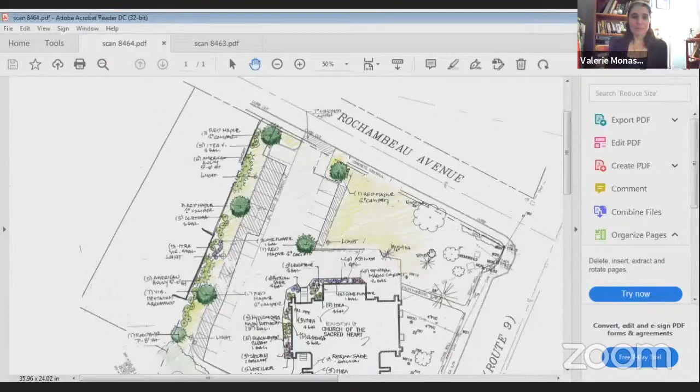Okay, so let's take action on it now. I know we have a resolution for it. So let's move to...

Is there a motion to resolve that, as an essential precondition to further review of the proposed project, the Board of Trustees of the Village of Dobbs Ferry hereby directs that the project be referred for comment and recommendation to the Dobbs Ferry Planning Board as required by the zoning code, and referred to the Westchester County Planning Board in accordance with the general municipal law based on the proximity of the subject property to Broadway Route 9.

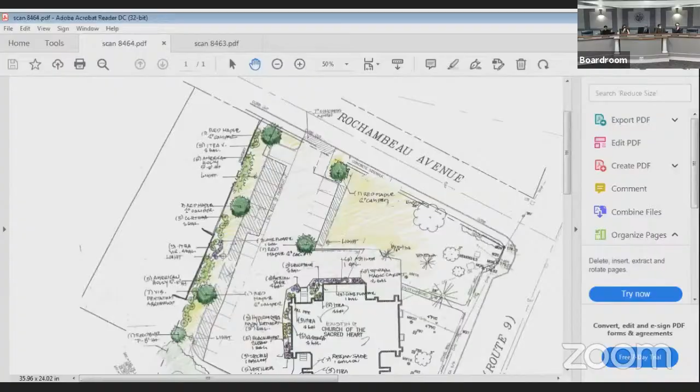Is there a motion? Trustee Patino, second. Trustee Nell, all in favor? We can't see, could you take that down off the screen? Sorry, okay, all in favor? Okay, that passes unanimously, so it's done.

We have to come back anyway. Yes, we'll see you in about... well, I'm not going to say. Thank you, hopefully we'll take care of it with the snow.

The next item is a presentation on the Main Street sidewalk improvements by George Palmer. I'm assuming he's joining virtually. I'm here.

So if I can just comment for the board and for the public before George begins: the village went out for bid once before on Main Street improvements, and at that time did not go forward with the project, I think due to COVID-related issues. In the meanwhile, some additional funds were identified and were able to be transferred over to the project, so you have a more significant amount of money to deal with, which should cover most of the costs. At this point, because of the length of the grants assigned to this project, we're told it must be completed by the end of 2022, or you're going to lose the grant funding.

So it's quite important that this process move along. George is here, we've had a number of meetings about this, with the tree committee and internally as well, to discuss the different options before you. I know we've discussed this before, but this is in greater depth. The time really now, in the best of all possible worlds, if you were going to try to accommodate the grant, is to try to settle on a plan, and if you're ready to move forward, to then authorize the preparation of the bids and get everything nailed down so you can start this project in early 2022 and get it done by the end of the year. So with that, I'll turn it over to George. George, thank you for joining us.

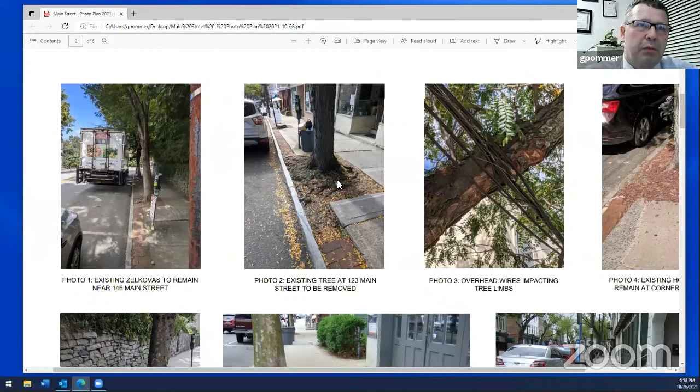Photo 3 shows the issues we're having with the low wires from Altice, the cable provider in the area. You can see that they're damaging the trees.

Photo 4 is out in front of Sam's Restaurant, showing one of the treatments that has evolved over the years, where someone put wood chips in that area to soften the jaggedness when the mulch or whatever treatment is in there gets washed out. In photo 2, there's no mulch at all because the tree roots take up the entire tree pit.

Then we get to photo 5. This is one of the trees that Wayne Cahilly wanted to save. You can see a buttress root in the background pushing up the sidewalk a good 5-6 inches. The village has trimmed out the sidewalk to reduce the tripping hazard, but you can see in this picture that the tree root is actually going toward the wall behind it. If you look at the lines of the stones, you can see the wall starting to be impacted as well.

Photo 6 is out in front of Steve Tilley's office. The tree is pushing up the decorative bricks, actually creating a back pitch condition where water is starting to go toward the doors.

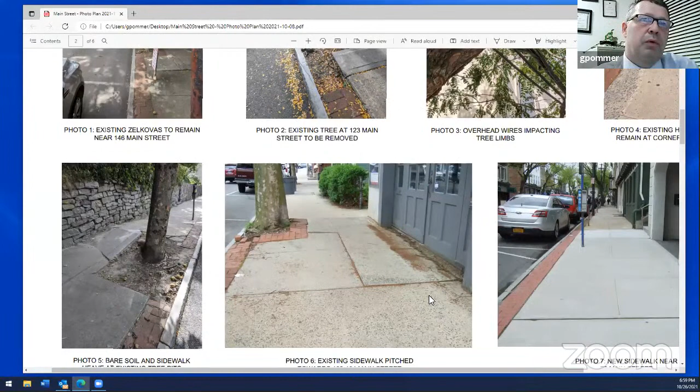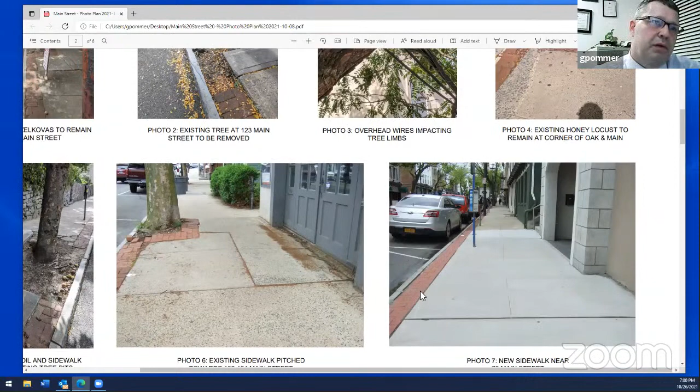Photo 7 is the final product. We have the same scoring pattern, not the same brick, but it'll have the same look. Once complete, you'll have this look for the entire project. Instead of the brick pattern, we'll have stamped concrete.

One of the cost-saving measures that came up, mentioned in the memorandum, is what was used in Bronxville, a rubber matting surface. Later we'll get into the numbers and cost, but this rubber matting surface for the entire project is $20,000. The grates and whatnot are around $100,000, so there's an $80,000 difference in savings. The landscape architect was accepting of this solution to protecting the trees, and it seems like a reasonable solution to an issue the village has.

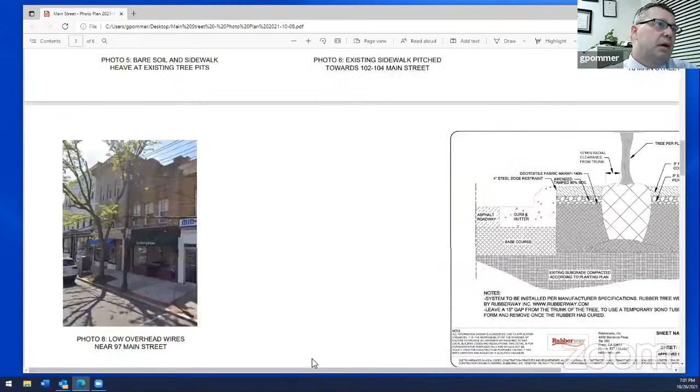I'm sorry, I missed photo 8. This shows the low wires that Altice has. Over time, what started as very small wires, you can see in this picture, keep getting bigger and bigger. So we've been in conversations with Altice about possibly undergrounding them, but it's going to take some time.

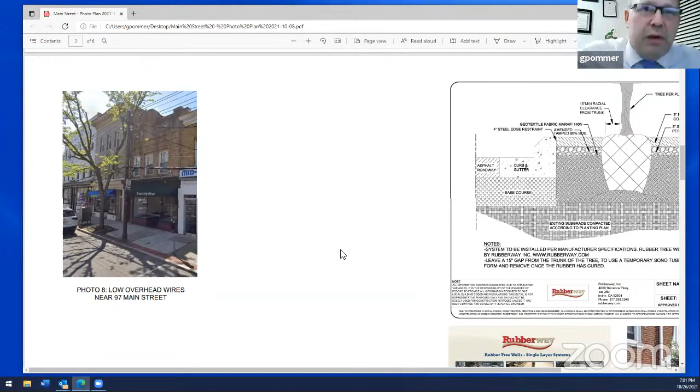We'll need them to come back to us, but the conversation's being had, and we'll keep everyone posted on the progress we make with them.

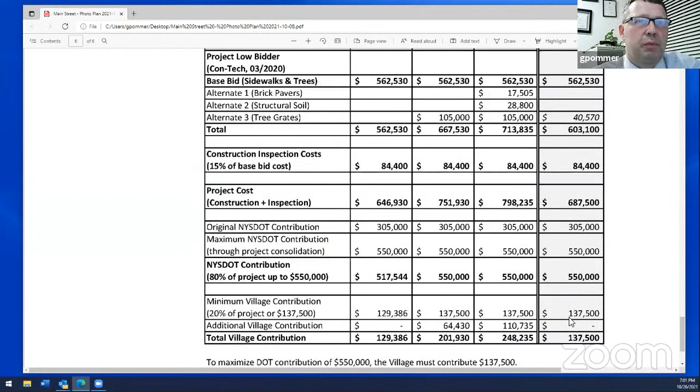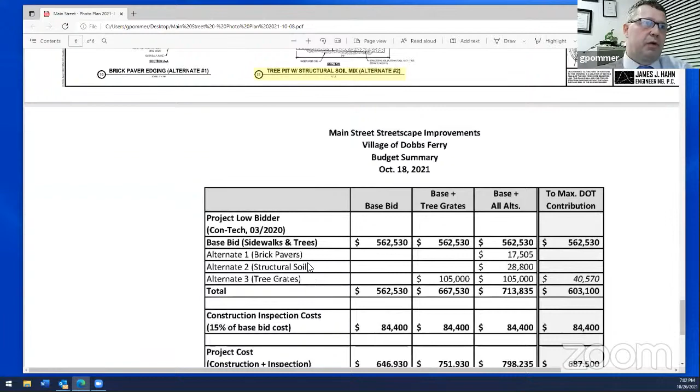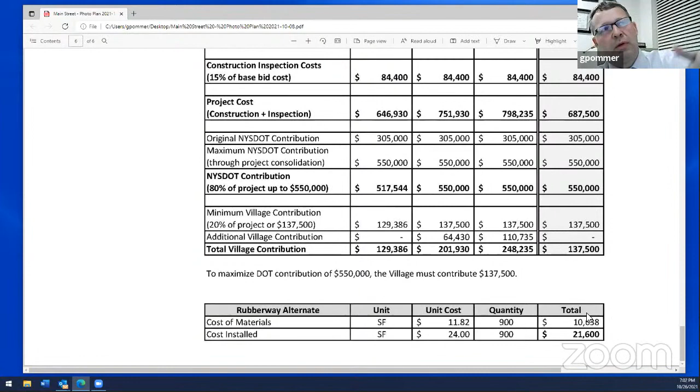We have some project details and the cost. As Richard mentioned, you got more money from the DOT—$550,000. To max out your contribution, you need to put in $137,500. The total project cost is $687,500, with a number of modifications to the bid. If you wanted to add the structural soil and the rubber matting, you'd be in that $687,000 range, maxing out your contribution without going too far over the total cost. That's it for now.

The memo Richard forwarded talked about other issues, like low carbon concrete. We did another project and the state was accepting of it. We tried to do the glass-crete, but we still haven't come to a product that concrete manufacturers or transit mix companies will produce and send to us for this project. We do have another product, a slag mix, which DOT will accept. It's the current form of low carbon concrete we're using in Hastings, until we get that glass product into production.

And that's, we'll have an ADA compliant product. The DOT has reviewed it. That's going to upgrade it to modern day standards.

One of the issues Richard mentioned earlier was schedule, and that was in the beginning of the memo, which is important. So we have the projected November bid date, identify the contractors in December, start the project in February, project duration 6 months, the grant ends in December. So we should be on time for getting all the money if we hold to that schedule.

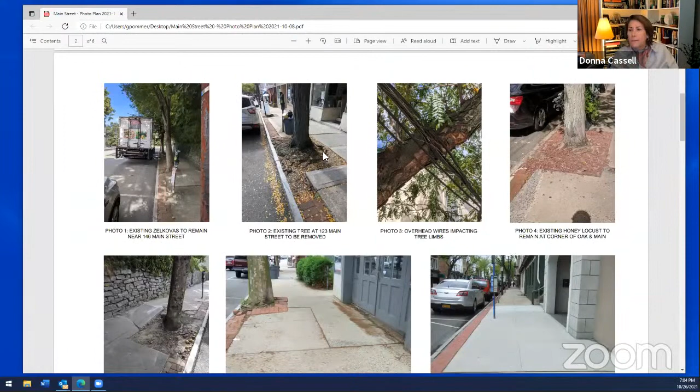So we looked at them back in 2019, and the issue that we had with the bump outs—I know Patty Steinschneider looked at them as well with the traffic committee—is that we have buses and box trucks coming down these hills and going up them. The problem is when you put those bump outs in, vehicles start going into the other travel lane, and we can't have buses and trucks going into the other travel lane.

George, it's hard to hear you, we're not really hearing you clearly. I don't know if maybe you're too close to the microphone or not close enough. But our air just turned on, so it's worse now. Can you hear me now? No, it's worse. Hello? No. I just upped the mic. Is that better? Well, everybody else says they hear it clearly on Zoom, but we don't hear it. Can we turn it up in here? Oh, okay. Go ahead, try again, George. Hello?

So we looked at the bump outs on Elm Street. Yeah, can you hear me? Yeah, go ahead and speak loudly.

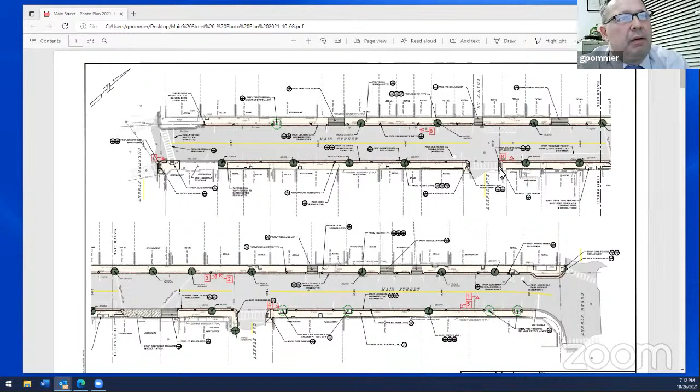The issue that came up was the concrete transit company won't add that product, won't give us a design mix to give to the DOT saying 'here's 20% pozzolan, DOT, this is the mix.' The transit companies haven't picked up the product. The product exists, and the DOT will accept it if they jump that hurdle and get the transit company to give it to us. I've been in conversation with them as recently as last week in preparation for this meeting, to find out where that's at.

They said they're going to reach out — there's three transit mix companies: Dakota, Byram, and Brewster Transit. One of them needs to add this product to their mix to get that ball rolling. And none of those three have done that yet.

So we did look at it. We're anxious to get glass into concrete, but that's where we're kind of stuck. If the concrete company won't send it to us or won't give us a mix for it, we're kind of stuck. This uses recycled glass from the Yonkers recycling facility, grinds it up, and puts it into the concrete mix. It takes a material that's otherwise not very useful and puts it into concrete, which is a huge carbon emitter. So it's a positive thing.

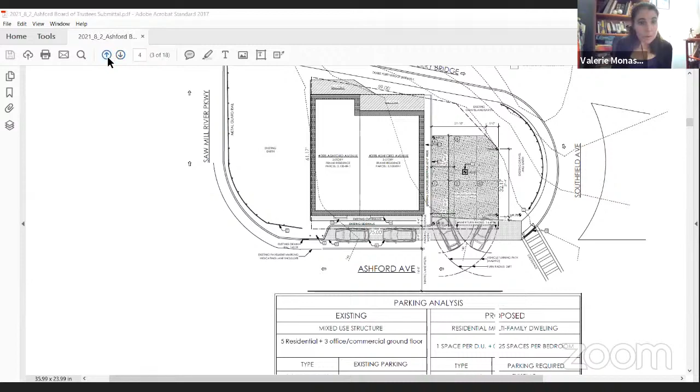So here are those two spaces being proposed. Right now this is the existing sidewalk, and this curb cut would be removed and would ultimately become those two parking spaces. So as you can see, the concern is that the parking lot is already not ideal, but it would allow additional spaces for the proposed building. You're going to have cars coming, entering, exiting the parking lot, plus the two on-street spaces, plus your on-ramp and off-ramp to the Saw Mill River Parkway. So there's just a lot taking place in that small area.

I just don't see the space. Even looking at it from a satellite, it doesn't look like there is enough space for somebody to safely enter the building, even with a car in there. The spacing is very narrow for it to be considered safe.

It is narrow, and these are all valid points, I don't want to diminish them. But I think the important thing to consider is that if this was retail, for example, it would be cars coming in and out on an hourly basis. Because it's residential, it's not like everyone's leaving and coming at the same time. People leave for work in the morning, but they don't always leave at the exact minute someone else is pulling in. It's an entire day, right? If you're off by a minute, you're not colliding with another car. That's just the way it works.

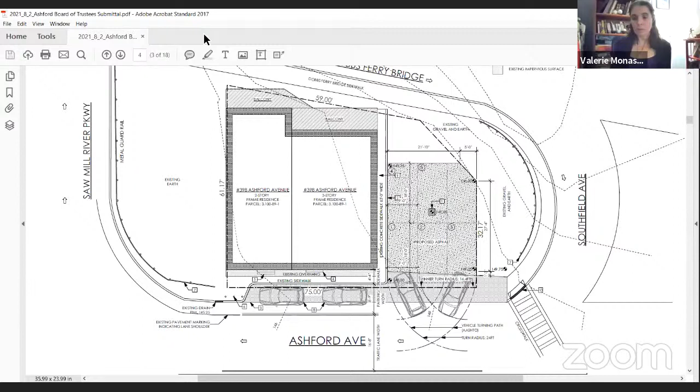No, how did they exit the space? Do they get on the parkway? I think they have to exit onto it, right? Otherwise you'd have to do a U-turn over a double yellow line. There's a house across the street, they have to use that driveway.

Is the line below the cars the line on the parkway? Is that the lane? I mean, this isn't detailed, this piece here.

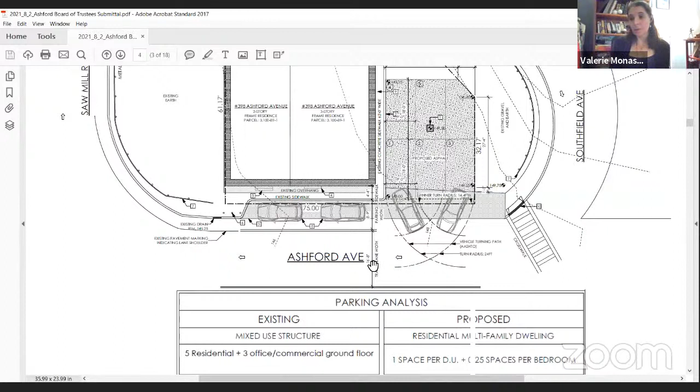So it looks like the traffic lane width that they're showing here is 16 feet, 8 inches. And that I would assume is the roadway width. We can pull up the Google image if you'd like, that might be easier than just looking at this.

It is helpful to see. Richard, it looks like that line you're seeing is actually the striping for the width of the road, on the highway, right?

Yeah, my concern is also, as you just mentioned, the other side of the road has a house with a driveway. For what I've witnessed in that intersection, it can get hectic at times. With movement going on, vehicles getting off the highway, vehicles coming into the highway, the more I see it, the more I just don't think it's a smart thing to do.

Well, what gets me is the experts have decided it's not the right thing to do, right? The planning board has said it shouldn't go there. The emergency services have said it shouldn't be there. And I think Anthony said it shouldn't be there too. So am I correct in restating that?

Yeah, well Anthony did say, he was looking at it straight, particularly whether physically it would fit. This is the existing building right now, and this is the existing sidewalk, and then there's the on-ramp. So theoretically, some of that existing sidewalk would be removed in order to accommodate the on-street parking.

Valerie, show the top-down view, if you will, because I just pulled that up on my computer. It's interesting, there's a car parked the wrong way down off the road on the off-ramp, then there's a driveway, then there's on-street parking. It's interesting, you have a different image than I do, must be different timing.

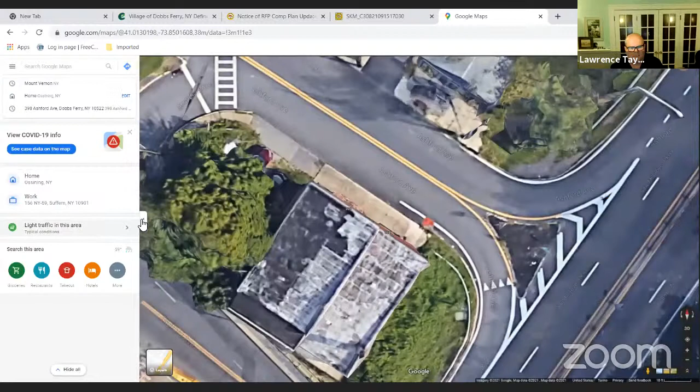But if you picture a car parked across the street, on the concrete piece that's lighter there, cars coming on and off here—you can't see my arrow, but—and then a car coming out of the driveway and cars on the street there, it is very, very tight to add two more spaces there that are going to be utilized frequently.

Okay, this is a public hearing. Is there anybody from the public who has any comments? Is there anybody online?

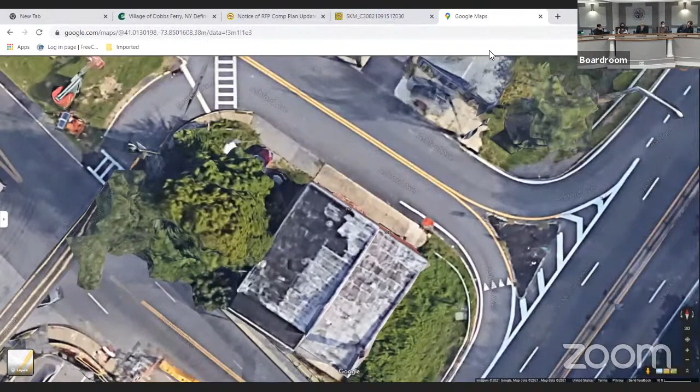Hi, hello, we hear you. Can you hear me? Hi, Lee Constantine. I haven't reviewed this project to any extent, but just prima facie, it looks like it's really a dangerous thing to want to do. I can't see how that is safe.

Rick, do you have any comments on it? I hate to put you on the spot like that. You haven't done a study probably, but what's your thought?

Let's go to the microphone, so we can hear you. Yeah, whether or not we should plan on having two cars there, or no cars, or one car.

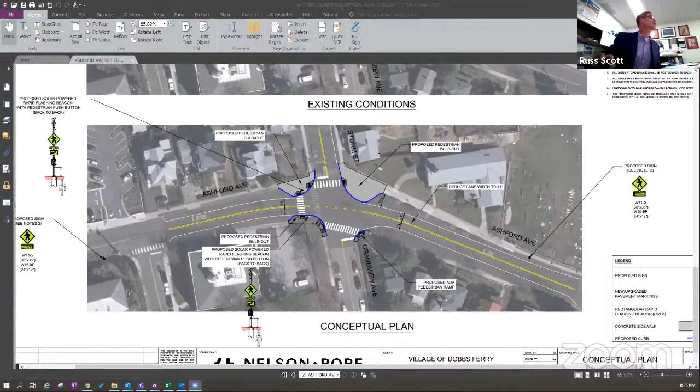Yes. So initially, before we met with the traffic committee, we came up with adding curb bump outs on the western side of the intersection, to shorten the crossing distance for pedestrians and to try to slow down traffic headed east and west along Ashford. Along with these curb bump outs, we were looking to install rapid flashing beacons with push buttons. They only flash when activated, and crossing guards could use these to help assist kids across the road during school hours.

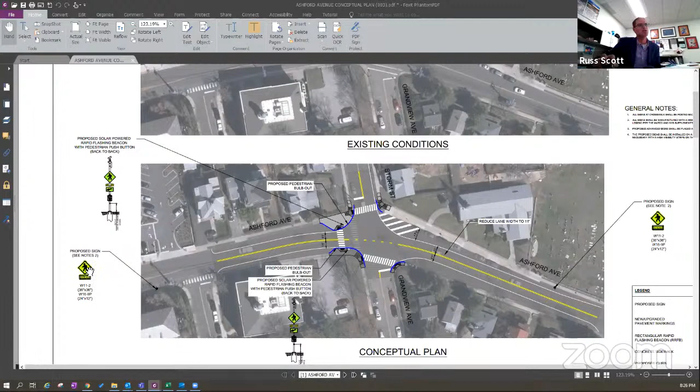Another concern was the speed of vehicles making the right turn down Storm Street, so we looked at addressing that just with pavement markings to keep costs down. We realized the grant is only for $80,000, and costs are increasing right now. So to stay well within budget, we thought we'd install these 2 curb bump outs with the rapid flashing beacons, and add some advanced signing in accordance with the manual.

After that we had some additional thoughts. There was concern that people making the right turn would just drive over the markings, not really solving the right turn issue. So I was asked by the traffic committee to consider adding crosswalks at all 4 legs of the intersection. After my site visit, I determined it wasn't necessary to have a crosswalk crossing Ashford in 2 different locations. It would drive up project costs, because with 2 crosswalks, one on the east side and one on the west, you'd want rapid flashing beacons on each one. So it didn't seem reasonable to include both crosswalks, since pedestrian traffic wasn't as heavy crossing Ashford. I didn't see the need for 2 crosswalks.

I'd also like to note on Grandview there's existing sidewalk on both sides of the street. On the west side it only extends about 150 to 200 feet before ending. On the other side it extends about 500 feet, but also ends. So there's no reason to put a crosswalk on one side or the other just because of the sidewalk, since there's no continuous sidewalk through the project area.

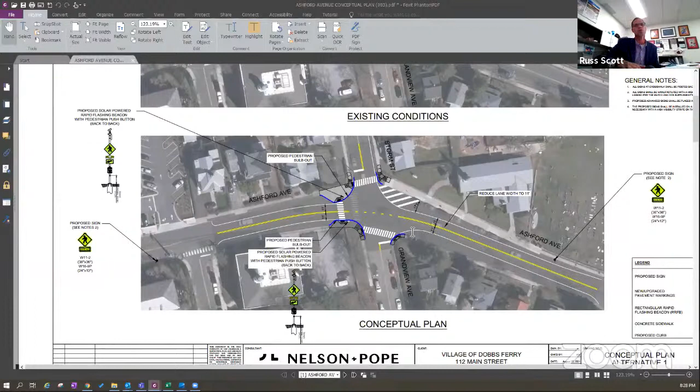There's also a concern about sight distance heading west along Ashford Avenue. As everyone knows, there's a hill there, making it difficult to see the intersection and people in the crosswalk. So we felt that the further we move the crosswalk from the hill, the better reaction time drivers get to see people in the crosswalk, see the signage, react, and hit their brakes. So the other concept included this.

The other concept included another curb bump out on the east side of the intersection, just to eliminate right turn vehicles from slipping through. It also provides the ability to move the stop bar and crosswalk out closer to Ashford.

I noticed when I was out there, a lot of the cars pulled way past the stop bar, in front of the crosswalk, to be able to see cars coming from the left and the right. Kids were then crossing the street behind that vehicle, with another vehicle pulling up behind them, which creates a dangerous condition.

So I feel by adding the other bump out, you have the ability to move that stop bar further up, so that people can see up and down the road. It also eliminates that right turn vehicle from trying to get around the person going through, cutting off and

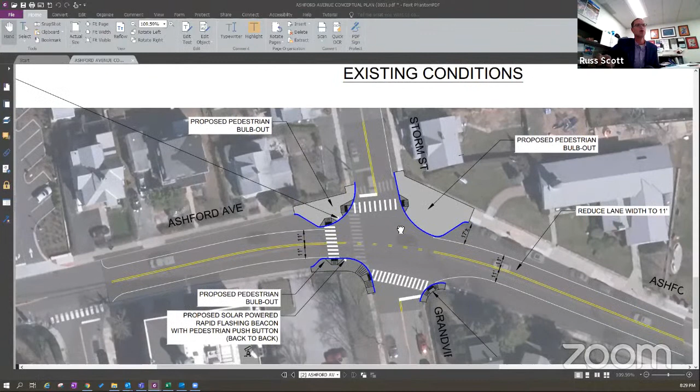making a quick turn up Storm Street. We revisited the costs. This does not include another crosswalk on the east side of the roadway. We believe that with just curb and concrete sidewalk and an ADA accessible pedestrian ramp, we could find

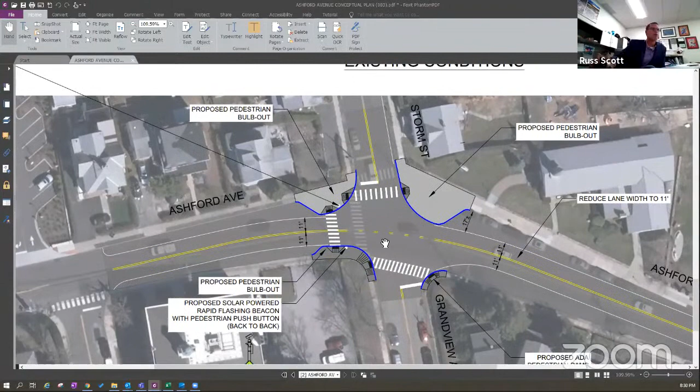a way to fit this into that $80,000 budget. So the overall goal is to improve the sight distance, shorten the distances, and allow vehicles to see the pedestrians in the crosswalk by the use of signs.

I do have a concern for once we get past the intersection. A lot of vehicles use, even though it's not striped as 2 lanes, this as 2 lanes to get to the right turn lane further down the road. By reducing the width of the roadway during peak hours of travel, the backup along Ashford will be extended because people won't be able to sneak around the car waiting for the light to turn green further down the road.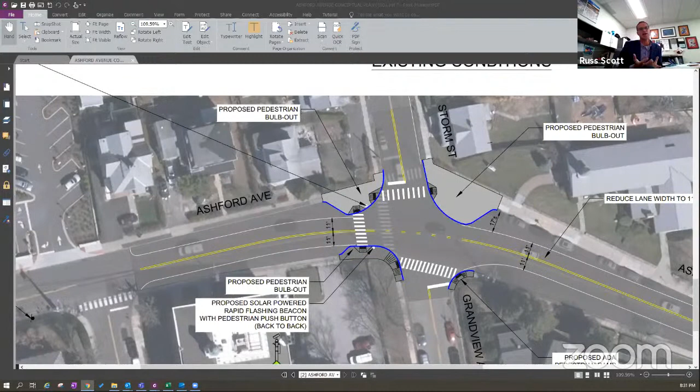So there's always a trade-off on pedestrian improvements versus capacity improvements. That is something that needs to be considered. I do see that queue length will increase. I can't say how much, but there was a significant amount of cars sneaking past those through cars.

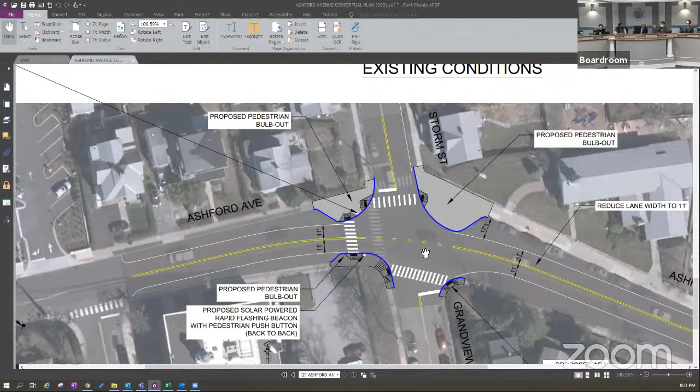And I just want to be clear, the traffic committee, the difference was they wanted a crosswalk over another crosswalk going over Ashford. Yeah, they still wanted it, I was in the meetings. We're talking a lot about the Springhurst school and the left side crosswalk, but there is also the nursery school over there on the right.

And I'm not sure if the engineer was there during that part, but there's a lot of people just bolting across the street to pick up and drop off kids at the nursery school, with much younger kids that are more likely to just jet into the wrong place.

And so the traffic committee still wanted that 4th crosswalk there to complete the system and to have that space for the people who cross there to be able to cross, because they're not going to go all the way to the other crosswalk to do it.

Yeah, you have to go 3 crosswalks. If you're on the south side of Ashford heading west, like where that right box is in the bottom right-hand corner, walking down Ashford, you have to make 3 crosswalks to get to the nursery school. Whereas people aren't going to do that, they're just going to cross the middle of the street. Right, so there's a certain logic there. I mean, I just prefer this plan because I think there's just the extra curb.

I don't know, we talked about a little traffic backup versus the potential of a kid getting hit by a car, and I think it's the obvious choice. We'll deal with a little more traffic. But I guess it seems like you should always put in 4.

I was just thinking about the other one at Gould Park, Washington and Ashford, where there's only 2, right? And the other 2, I mean, people are crossing on all 4 sides, especially when there's a football game or something and people are parking up at the hospital. So I just think there's a need for it.

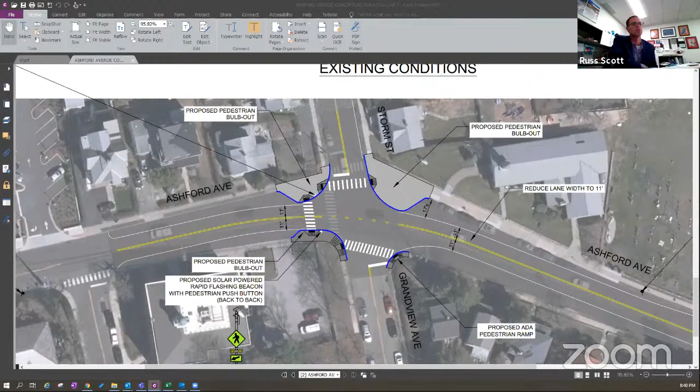Is having a stop sign there not an option? It could be considered, but then you're backing up the traffic—it's the capacity versus safety thing. When there aren't people in this crosswalk, you're stopping all that traffic from flowing freely, 24 hours a day, instead of just for a couple hours.

What else? We really need this, but even with this design, traffic is already problematic here, and this is going to create an even larger backup. Yeah, tremendous backup. Well, maybe some people will start taking different ways to get to work. It's 7,000 times better than what we have now, which is just a big open free-for-all.

Yeah, after you get past Storm Street, that spot right there is a free-for-all.

How much is it for all the planters we're going to need for those bump-outs to make it attractive? I was thinking about that—that's not in the budget, but maybe a rain garden could be considered. A small rain garden, or a rock garden—you could do it.

Can we really design something that won't compromise the view of anybody making a right turn or passing through, but that will be like a small island in that section by the school? It's large, yes—something that can be like a little island there to create some green space. Yeah, that's a good place to spend some extra money.

Yes, correct. You could install some low-lying plantings. We just threw a gray hatch in there, but you can definitely make that more decorative.

But I mean something with open ground right on that section—not something already built around it, where you'd be fitting planters in, but right in the ground. Yeah, like it's not all concrete.

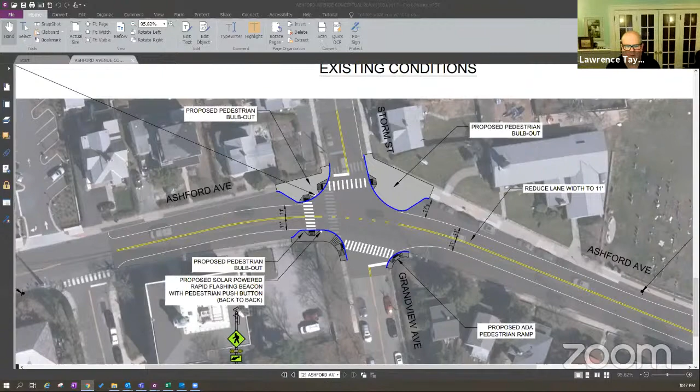I guess I'm behind the intersection here. Other people are much closer to this than I am. I agree that we should do something to calm this traffic, and this seems like a very reasonable plan as proposed. The only thing I would maybe ask is whether it would make sense for Russ or someone to be there when the nursery school is coming and going, so we can observe exactly how much risk is being taken going across there. Yeah, 9, 12, and 3.

The thing with the bump out that concerns me is that if we do something beautiful there, people are going to want to cross from there more, since it's shorter now. And then we wouldn't have a crosswalk.

Donna, what do you think? The traffic committee has been looking at this for years, practically since the time I started on it. It's long overdue. That's a horrific crossing, we have got to have something there. It's just way too dangerous right now.

This particular plan looks good. It seems to take care of all the issues.

I was thinking maybe a stoplight, the traffic light, but as they said, it would back things up ridiculously. Would we be better off with, or maybe we can't afford it, a flashing red light stop sign rather than stop signs on each corner? Or will the stop signs on each corner do the same thing, a lot cheaper, a lot less expensive?

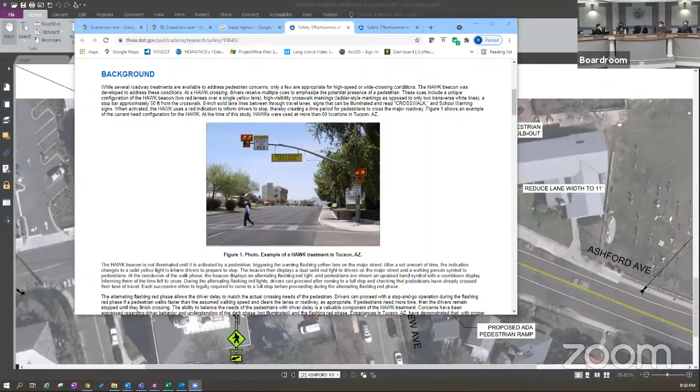I think generally we were all in favor of the concept that you showed us. So if you want to move forward with that, I do think it would be a good idea if you go on a day when Christian preschool is operating, just before you make the final plan to us. Okay, and then if you could present, I do think the majority of the board is fine with your concept, so you can move forward with it. Thank you very much. Thank you.

Next is the RFP for energy performance contractor. I know we've had a presentation done by someone from Honeywell, and this is a follow-up to that.

Richard, do you want to take us a little further on it? Sure. The idea of the Honeywell review and analysis was to see if they could identify sufficient potential energy savings and work that could be done here to improve your energy picture and utilization. Then from that, if there was sufficient potential, the next step would be to put out a request for proposal for an energy performance contractor.

Under state law, there are certain entities designated as energy performance contractors. They have to have a certain track record, a certain ability, and a recognized performance standard to do such work. So it's similar to any other bid that you put out there, you put it out and see what kind of return you get.